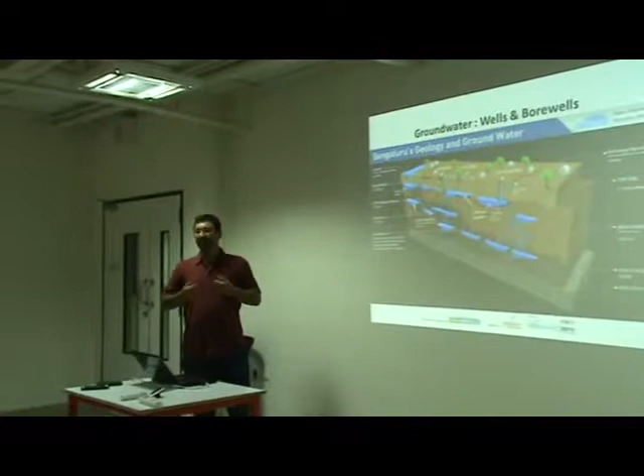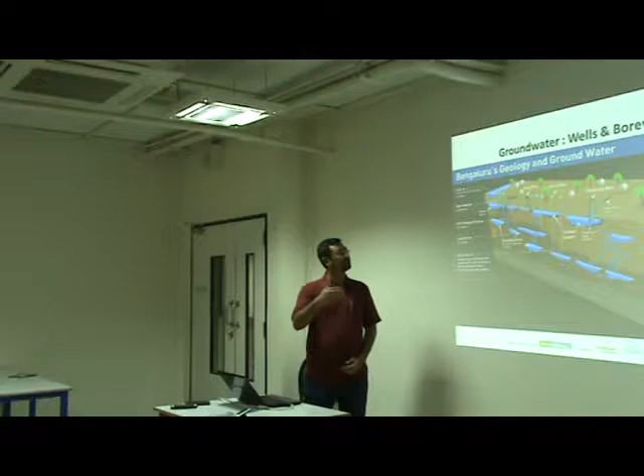What is an open well and what is a bore well? I think it's important to understand that. And if you look at the geology of Bangalore, it's broadly a 3 or 4 layer geology. The first layer is topsoil. The organic matter comes from there, the nutrients for the vegetation come from there. We are of course destroying it at very fast rates.

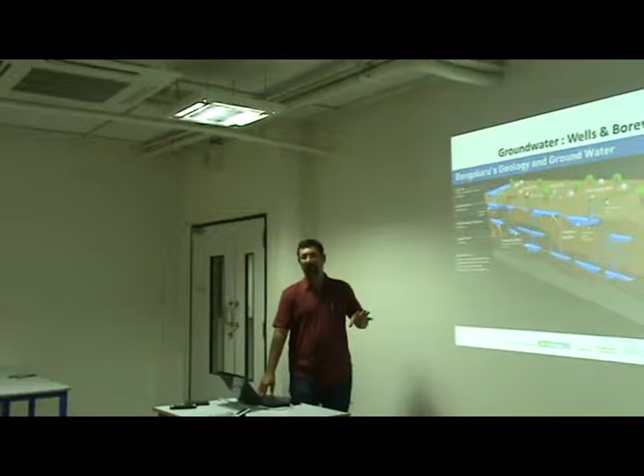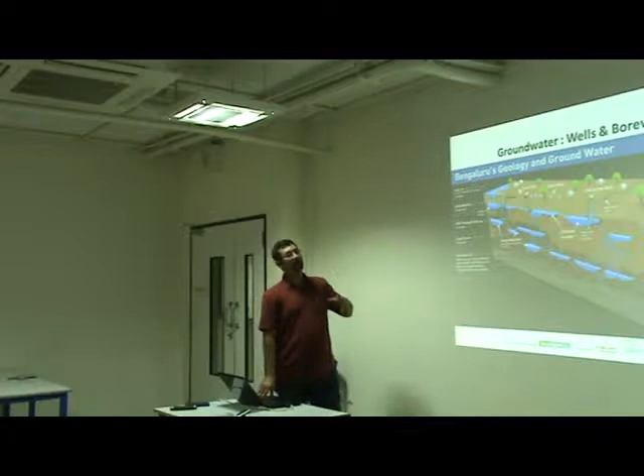But below that topsoil is something called the weathered zone. The weathered zone is essentially rock that has been powdered to what looks like soil. It has an enormous capacity to hold water between its spaces. Below this weathered zone is a zone called a fractured zone, which is rock, but it's fractured. And so it has capacity to hold water and a very high capacity to make that water move around. And below that is something called bedrock with neither the capacity to hold water nor to move water. Right? So the bedrock forms the bed above which the water table is building up.

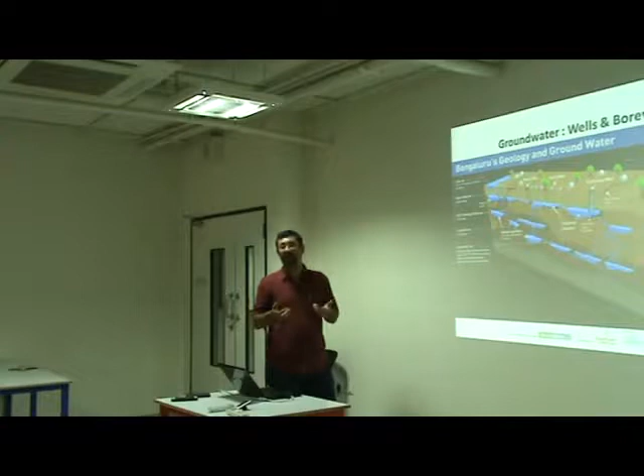Typically the weathered zone, which is what you see as soil mostly, is where most of our open wells are tapping into. So what is an open well? It's really a hole in the ground that goes down typically to the weathered zone, and it has water if that weathered zone has water. Whereas a bore well is a much narrower hole that goes way deeper. It typically goes into the fractured zone, where it's tapping into water that's coming from the cracks and the fissures of the rock. The weathered zone and the fractured zone are many times vertically connected. So the shallow aquifer many times is recharging or putting water into the deeper aquifer.

Earlier, all domestic purposes were primarily driven by open wells. The lakes recharged water. The lakes were an economic backbone in the sense that irrigation was driven by the lakes. And wells became a way in which domestic water needs were met. Then in the 80s, the borewells came and we started using borewells, and because borewells started pulling water out from the deeper zones, they started drying up the shallower aquifers slowly. So that's what an open well is and what a borewell is.

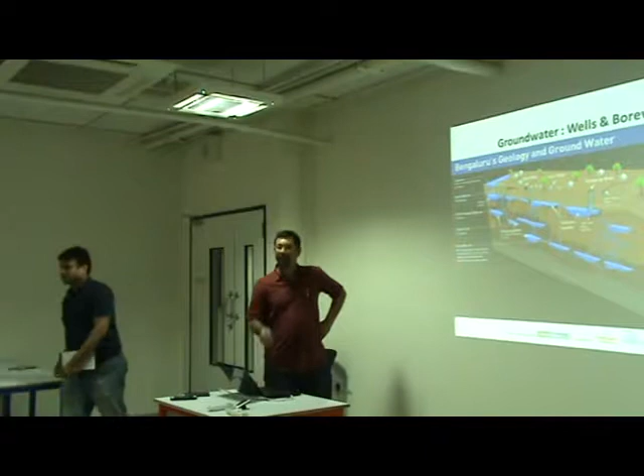Also notice that many things that we do on the surface, for example, the soak pits that are shown there, are all actually operating in the weathered zone. And if we don't treat our wastewater, if we are very careless and irresponsible with the way we deal with our wastewater, those pollutants and contaminants will eventually start finding their way to open wells and then finally to bore wells.

The advantage for bore wells is that it has a very, very large part of earth filtering it, the weathered zone filtering it, and therefore the quality of the water tends to be free from pathogens and microbes and things like that. But because it's passing through earth, it's picking up more salts, picking up more minerals, so it tends to have contaminants which are more geological.

Sometimes it's part geological, part man-made, because we are reducing our water tables and digging deeper and deeper and going to places where new kinds of salts and minerals are coming into our borewell water. So that's the geological understanding of water.

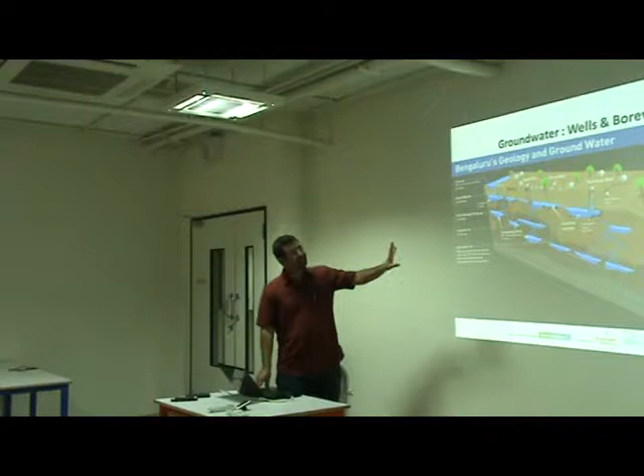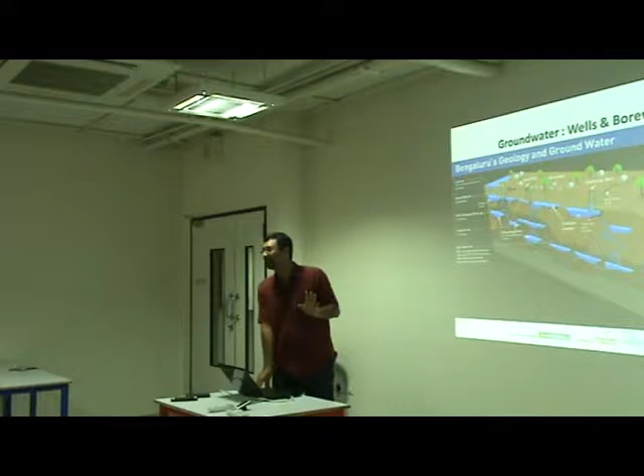Where is the water getting into all of this? The ultimate source again is the rain, through a process called recharge. There are natural processes of recharge through lakes, but increasingly there are ways we can do artificial recharge, because what we are doing is paving the surface and cutting off the source of recharge by hardening the surface. And how we can integrate artificial recharge into our management thinking around aquifers, we'll touch upon a little later.

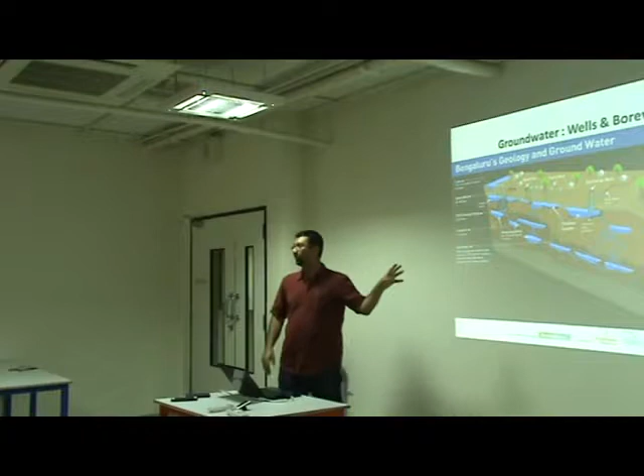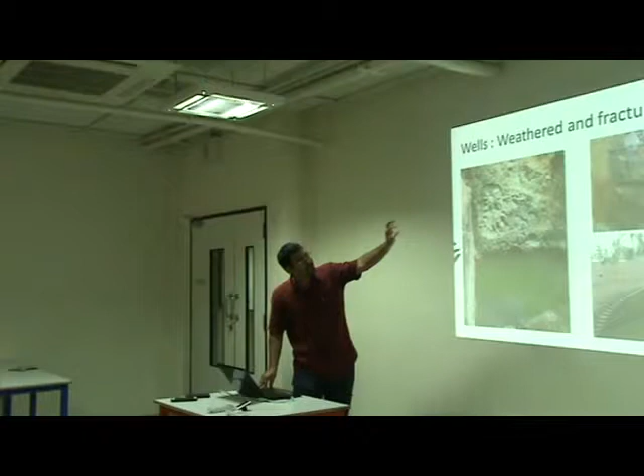If you see the one on the top right hand corner, there is a mix of weathered zone and hard rock there. So what you see as little, beautiful granite masonry work, that is where the weathered zone is. And weathered zone, because of its nature, can collapse. So you need masonry to keep it structurally integral.

So you see where there is hard rock, there is no masonry, whereas where there is a weathered zone, there is masonry. And the bottom one, near the Jakkur lake, is completely the weathered zone. So you see dry stone masonry, holding the whole well together.

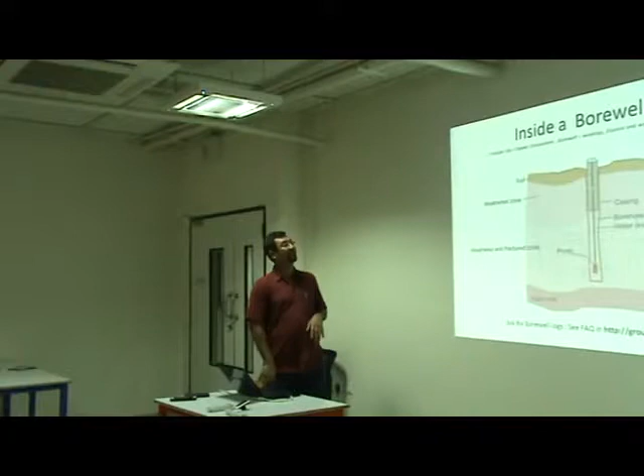These pictures are important because it will help us imagine how a borewell will look inside, and that's what I'm getting to next. So if you look at a borewell, this is a much narrower hole going right down. Here it's the same layers shown, but what the casing does is it replaces what the dry stone masonry does in the open wells.

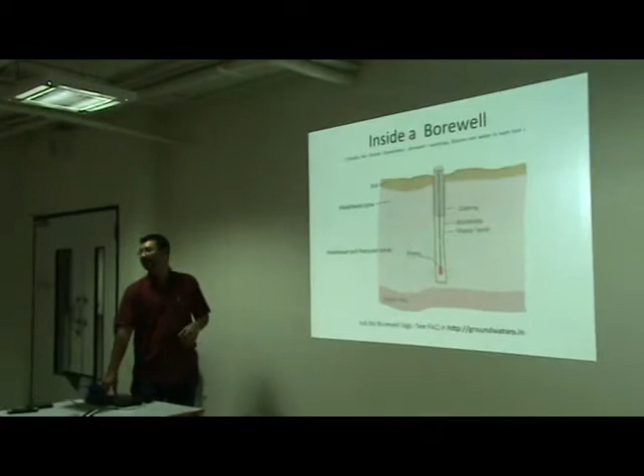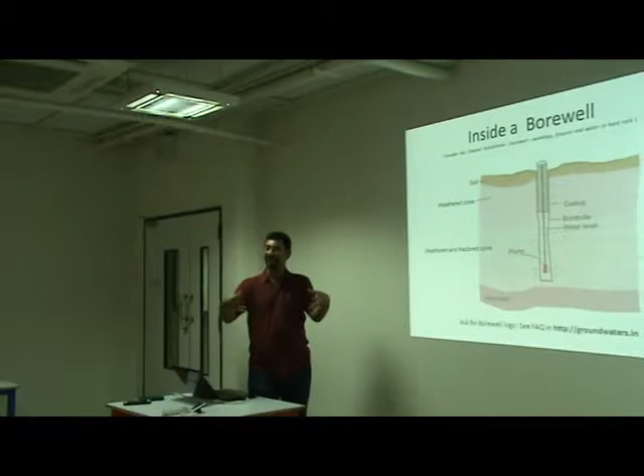You have the casing, which was earlier mild steel casing or steel casings, and now typically it's PVC casings, which holds the structural integrity of the hole where there's the weathered zone, because otherwise it's soil and it can collapse onto itself. Whereas as soon as you reach rock, because a hole in the rock doesn't collapse, you don't really need a casing there. So that's the first thing we need to understand about our borewells.

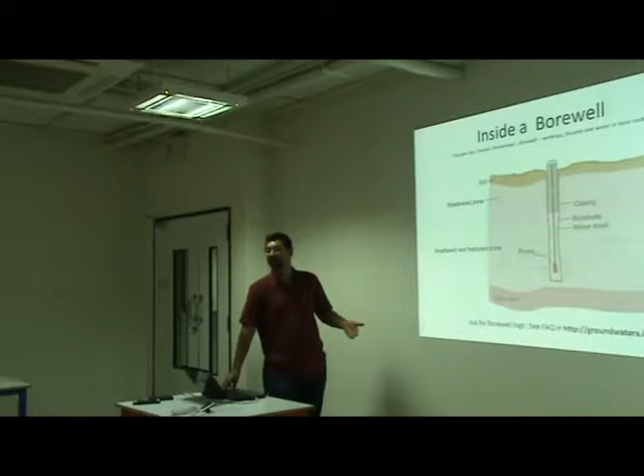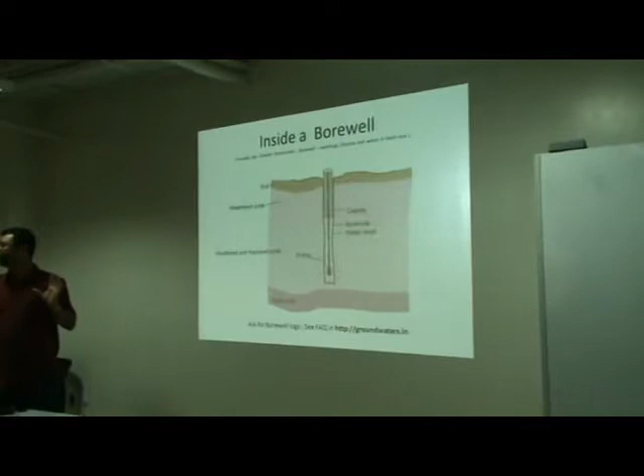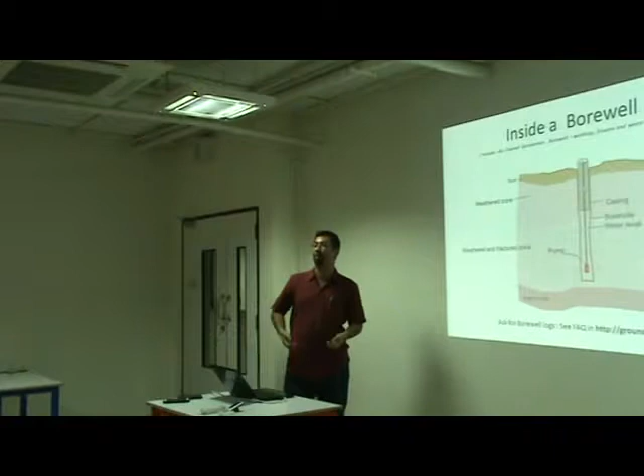It's a deep hole, so there's a total depth. There is a depth of casing, right? And the depth of casing is telling us something. It's saying that I hit rock here at a certain depth. So till the rock, it's the weathered zone, and traditionally open wells existed here. Below the casing is the rock, and that's the zone where more and more of our borewells are taking water from. Even within this fractured zone, you can have different kinds of densities of fracture as you move in depth.

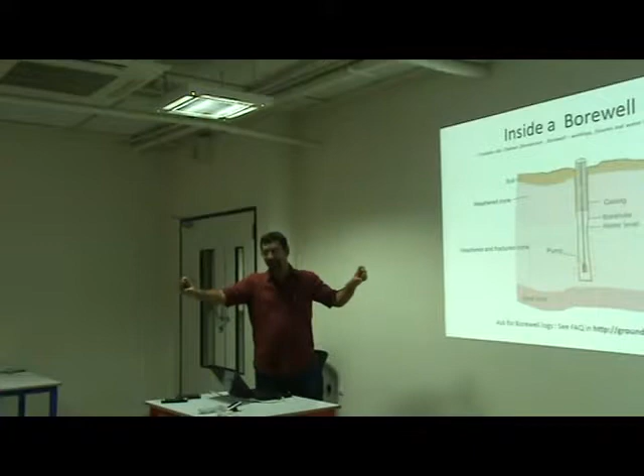And when the densities of fracture are all high and they are all interlinked, it forms what we call an aquifer. So there is one aquifer in the weathered zone, which is called the unconfined aquifer, because it's not under pressure. It behaves more or less like an open water body in terms of the pressure variations. Whereas the aquifers in the rock may be under pressure, right? And you can have different layers of aquifers even in the rock part.

So as you drill the hole, what will happen as you move through the rock is you will find cracks and fissures, and as you are drilling, you will find what you will see as little streams coming and falling into this hole that you are drilling.

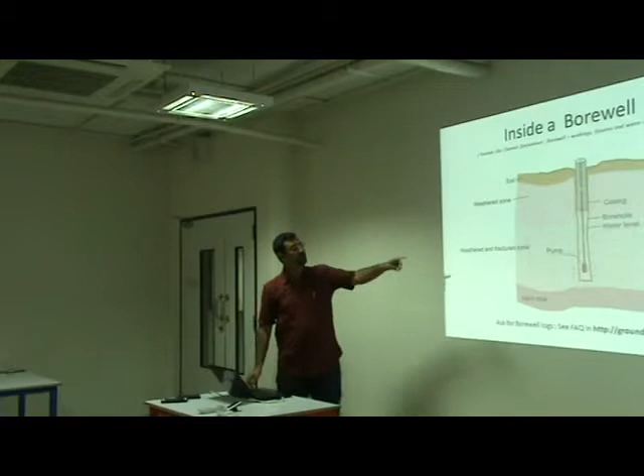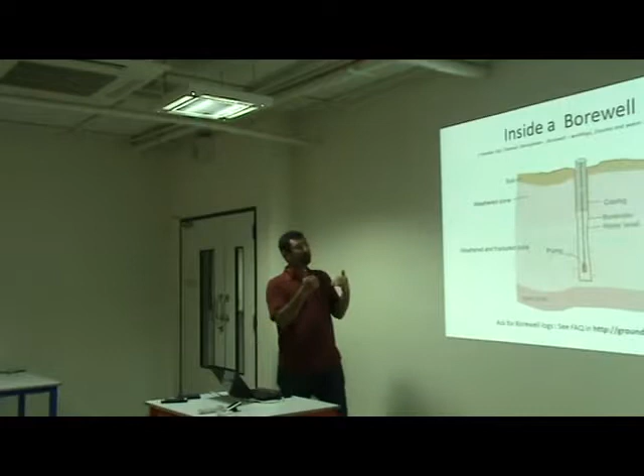And you may hit that at different points. So if you see here it shows some point here, it shows some points here, and this could be multiple points depending on the place you are in. But after you finish drilling, what will happen is all this water will come and it will stabilize at a certain level when all the pressure variations normalize. And the pressure of the water in this column will be the pressure that's holding all the water in these aquifers back as far as this borewell goes.

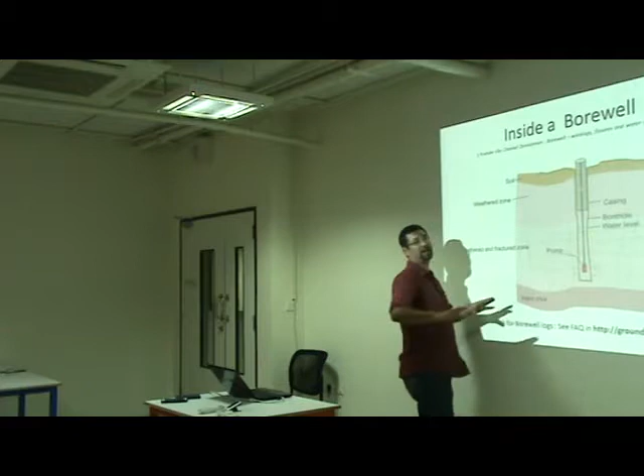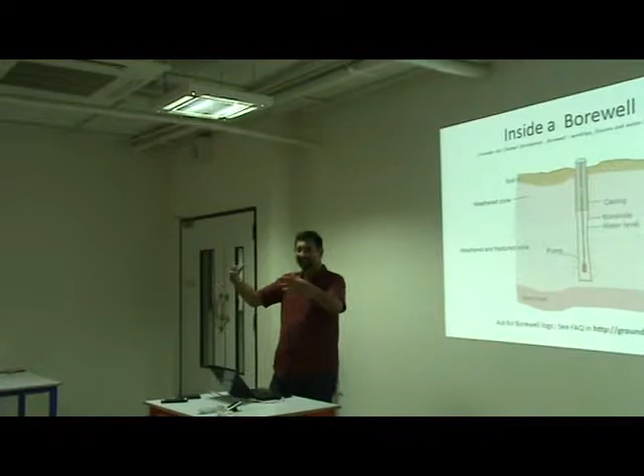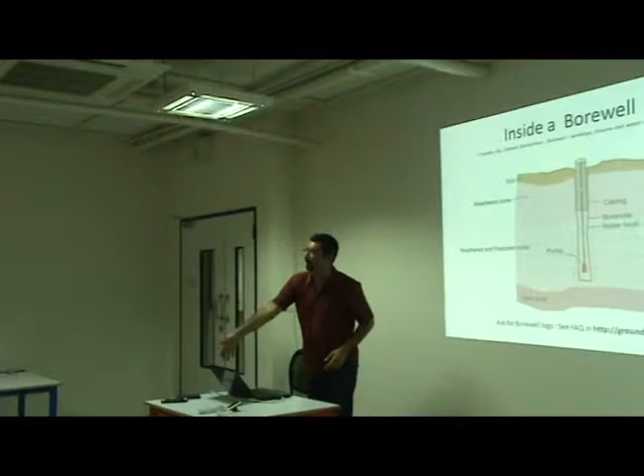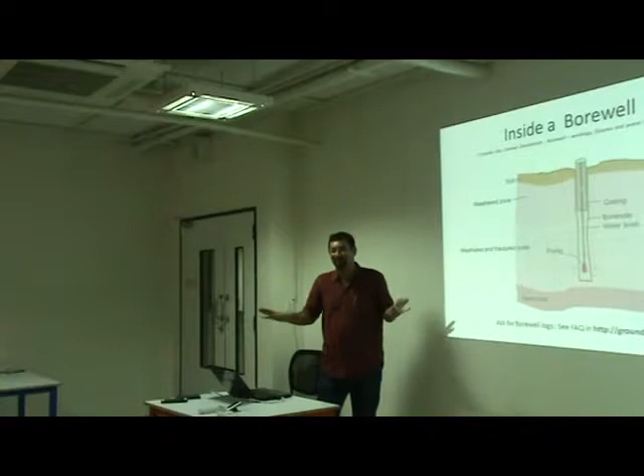When you do that, remember your energy cost of water is going up, right? And what is happening when you put in that mentality is you're already saying, I'm going to empty the aquifers, the shallower aquifers, and I want my pump to be so that I can tap into the deepest aquifer that exists. And that allows you sudden access to a lot of water. And unlike an open well, where you see the water level moving up and down, and therefore it's talking to you, a borewell is switching on and switching off. So you just switch on the thing and you just get the water out, and then one day you have to switch it off. So that's the disadvantage of the borewell.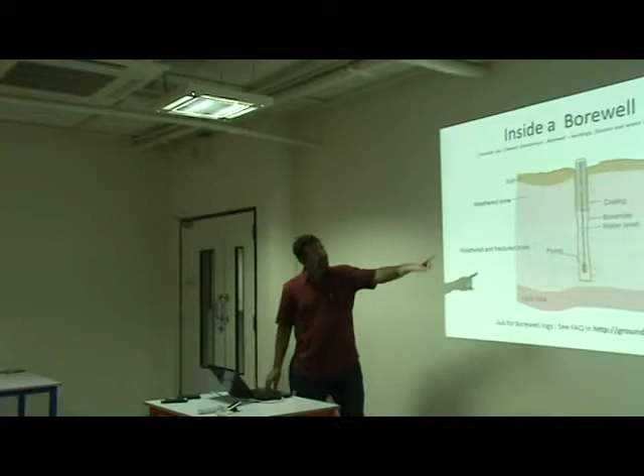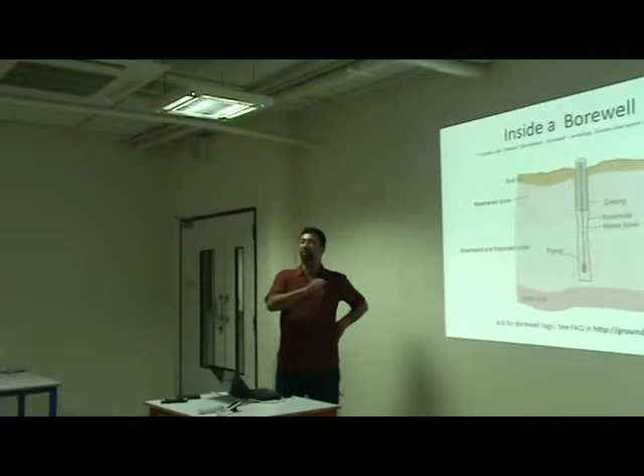But these things to understand about borewell, the total depth, the depth of the casing, the depth at which this water level stabilizes, the depth at which you put your pump, these are important things, and these form, to use more modern terminology, data points that allow us to begin to understand our wells and our aquifers. And often we forget to look at this data. When you dig a borewell, you're supposed to get a borewell log from a borewell driller. And it's important to ask for it. And he's supposed to document all this that I've just said as a part of that borewell log.

And if you were to take all the borewell logs in the city and put it together, you can actually come up with an aquifer map of the city, but we are not doing it, right? And we could be understanding aquifers at sub-aquifer level, at very local levels, and evolving management responses based on this understanding, but unfortunately that's not happening.

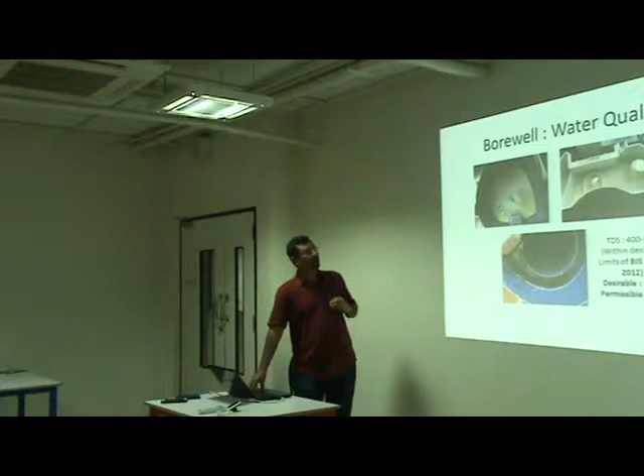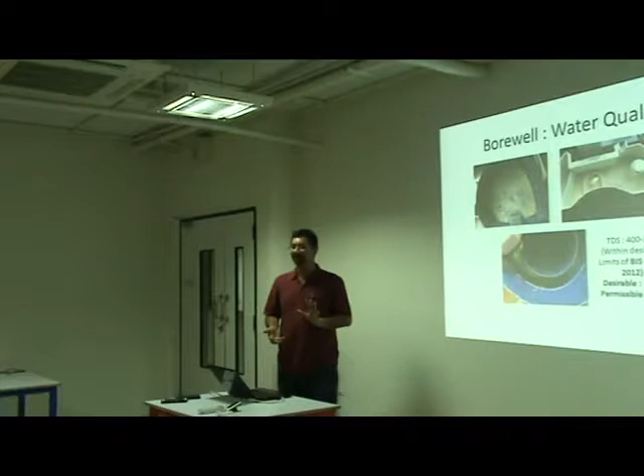So what about borewell water quality? I just touched upon that briefly in the beginning. Most borewells, especially as you go deeper, tend not to have too many problems as far as microbial contamination goes. But the water quality problems tend to revolve around what is in aggregate called TDS. Essentially, it's some or the other form of salt dissolved. Solving the water quality problem will then mean investment. So the entire industry of softeners, of ROs, etc. is really built around a shift from surface waters to groundwaters, especially deeper groundwaters. In fact, some of the lake problems of foaming are happening because increasing groundwater use means that the detergent industry responds with more foaming agents.

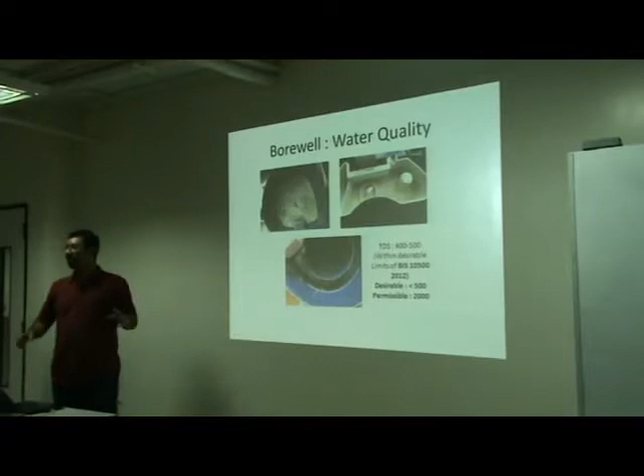Because as TDS goes higher, the water is not responding to the soap. So it's a kind of a vicious cycle that we are building for ourselves.

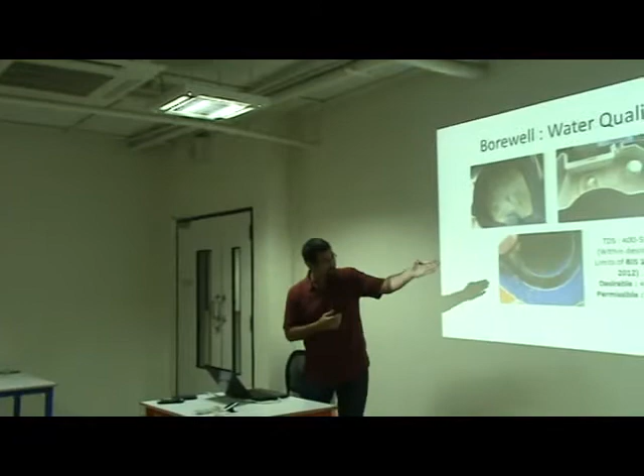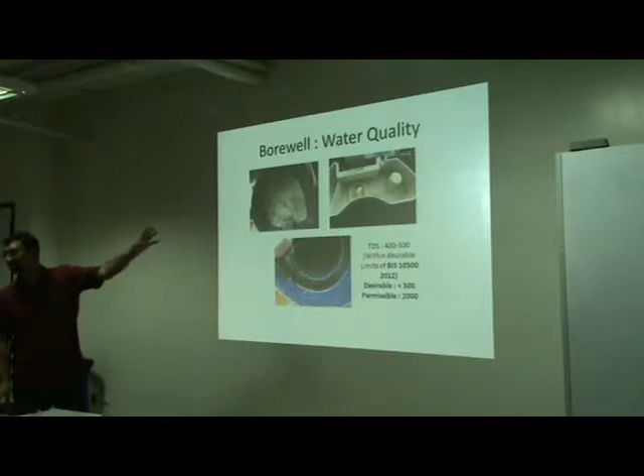Here are some pictures of my own filter, with TDS from borewell water around 400 or 500. Just because this water has some residence time in the filter, you can see the kind of salt deposit in the filter. If you look at the desirable limits, BIS standards 10500 2012 is the quality standard for India for water. You can Google it and get all the parameters.

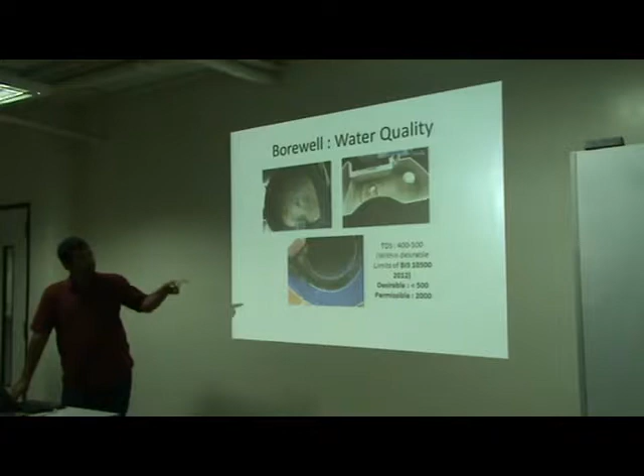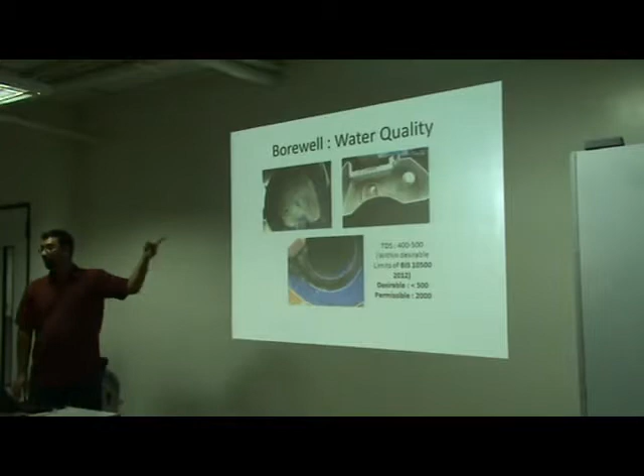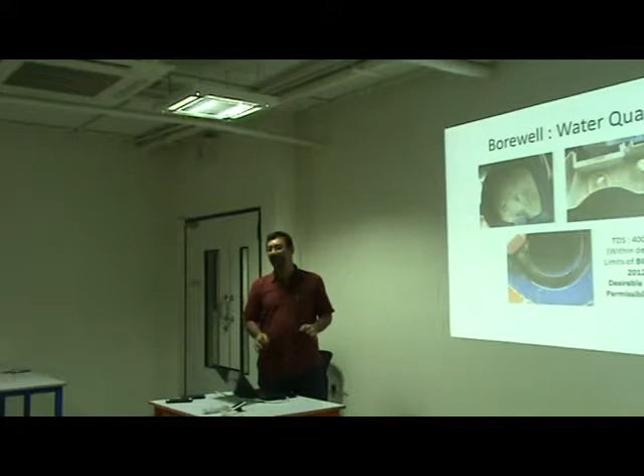The parameter TDS, the desirable limit is 500 and the permissible limit is 2000. Even when it's less than the desirable limit, the TDS levels create this kind of maintenance problems. This also means stains on tiles, stains on patre and vessels, problems of hairfall, and a lot of scaling problems with solar water heaters and other things.

So the cost of borewell water in economic terms from a quality perspective, I don't know if there's anybody who's actually assessing and measuring that.

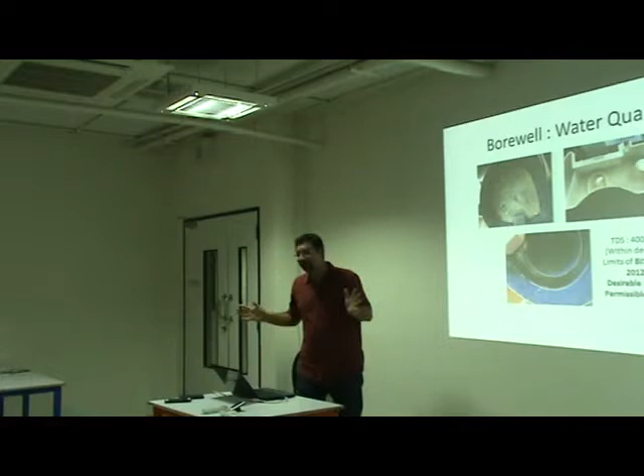In terms of regulations, there's the Karnataka Groundwater Act 2011, that's in effect right now. In my understanding, the center has post this created a model Groundwater Act which changes the principles and philosophy behind it, but that's still work in progress. It's yet to be adopted by the states.

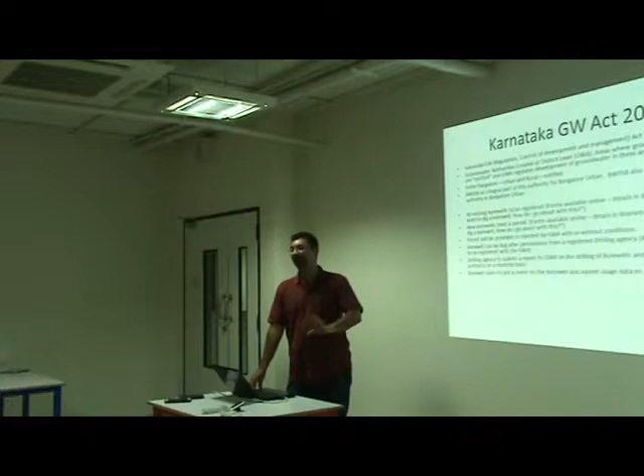But as of now, essentially what has been done is based on CGWB's studies, different areas of Karnataka have been declared as notified or non-notified. Notified means groundwater exploitation has happened there. And for all those areas, there is something called a groundwater authority at the district level. The groundwater authority is now supposed to control the development and extraction of groundwater, and regulate it.

So what it means is, in Bangalore, the entirety of Bangalore is a notified area, both urban and rural. And for urban Bangalore, BWSSB is the point person for the groundwater, as the groundwater authority. What are you supposed to do?

If you have an existing borewell, or if you're going to dig a new borewell, you have to fill out a whole bunch of forms. Those forms are available. Again, you can go to biometrust.blogspot.in. There is a detailed thing about which form you have to download from where, etc.

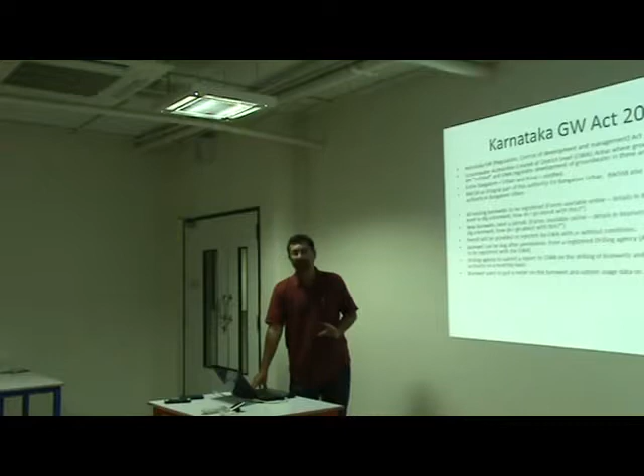You have to fill in this form, and by the time you fill in the data in the form, you're going to go nuts. But then that's the way it is. You have to fill in this form and give it to the groundwater authority. They will either give you permission or not, and they will give you permission with a certain set of conditionalities.

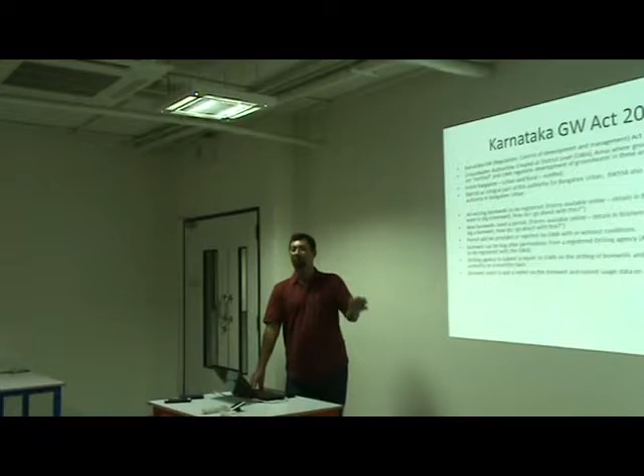Even after you get permission, you're supposed to give data about how much groundwater you're using from the borewell. And you're supposed to use only those drillers who are registered and authorized by the groundwater authority. The driller is supposed to drill only when you have a permit from the authority. So that's the regulatory mechanism.

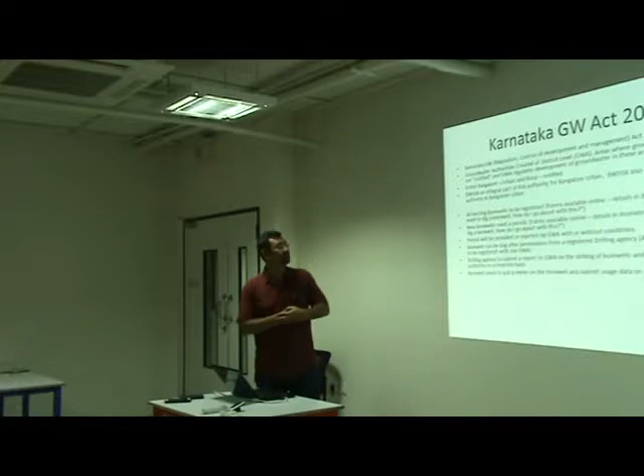Enforcement, as we know, is difficult. Not only weak, it's very, very difficult. How do you do it? Everybody can be drilling holes in the ground. But that's the regulatory environment as of today.

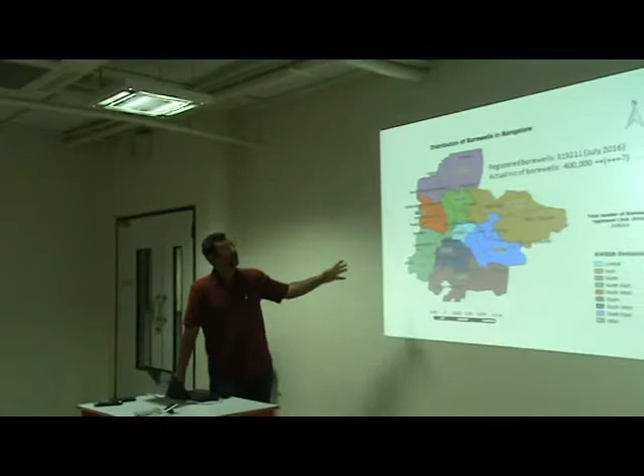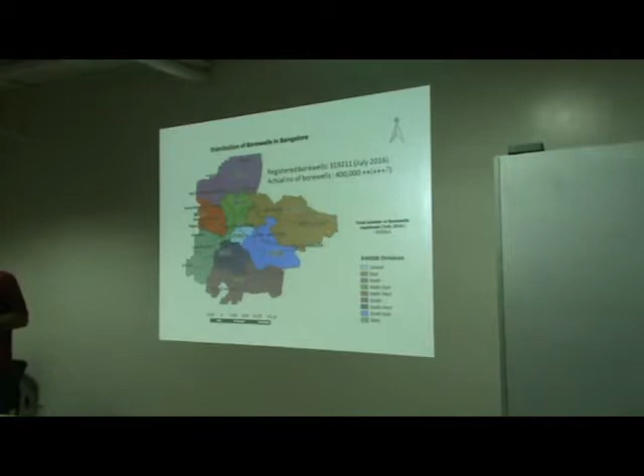With the help of BWSSB, because BWSSB is now registering the borewells, this is the officially registered number of borewells in Bangalore, around 319,211. Most significant of them come from the area which has Kaveri water supply, because BWSSB registers borewells whenever it gets connections. Post this act, post 2012, the registrations of borewells that have happened are not a proactive registration that BWSSB has done, but those law-abiding citizens who decided to register their borewell have been added to this list. This is the BWSSB division map, not the ward map of Bangalore.

If you were to overlay the ward map of Bangalore onto this, you will find many areas outside this. And therefore the real number of borewells—there have been academic studies to show it's more than 400,000. How much more we still don't know. So that's a lot of unregistered borewells. I don't know how many pluses to put there.

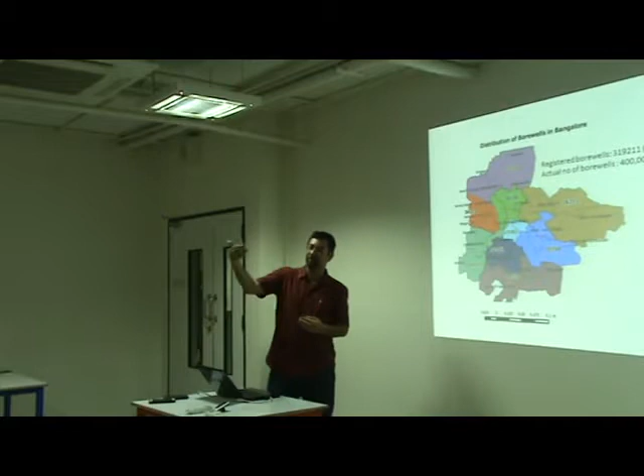That's why I left it as a question mark, but this is indicative of the rate at which we are drilling borewells. From my personal experience, going to communities multiple times after many years, one pattern I see is that when I work with a community, their borewell depths are something. I go back three years later, and some of those borewells have dried up, and they have to drill deeper to actually get water.

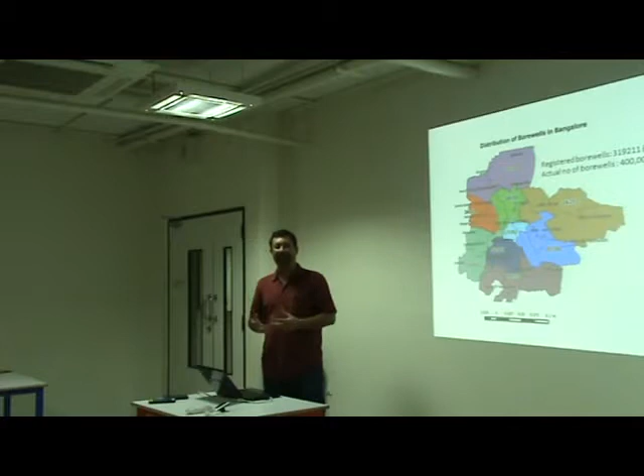The second pattern I've observed over the last 1.5 decades of work is that even to get the first successful borewell, communities have to drill far more boreholes that don't yield before hitting that first one that works. So we need to really think about the trade-offs between putting money into drilling borewells that don't work and investing money in some new ideas, which I'll come to.

And groundwater does not feature in our resource planning for water, right? So one of the first responses, and one of the first investments you can make, other than drilling borewells and buying tanker water, is to look at something called recharge.

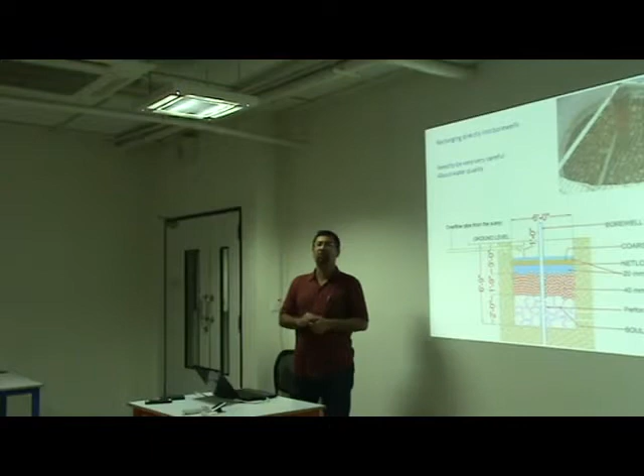Because we're talking about borewells, I first introduced the idea of direct borewell recharge, where if you have a borewell which was once yielding but is now not yielding, you can take clean water and put it back into the borewell. I won't get into the engineering details, but essentially you're taking clean water and putting it back into the aquifers in the rock zone using this method.

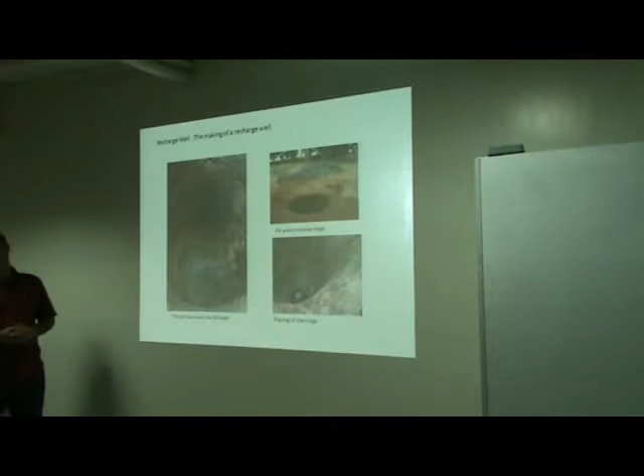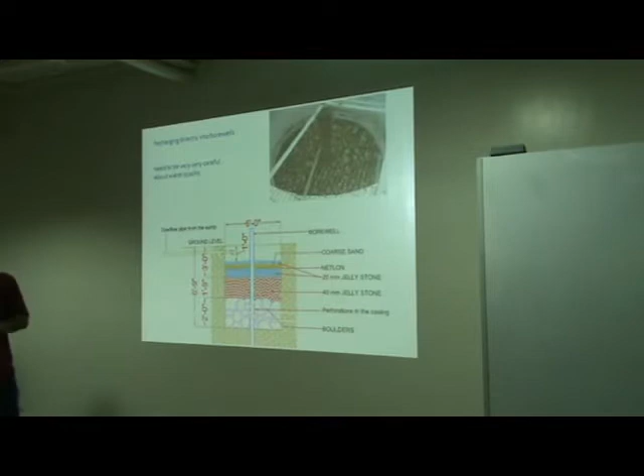But there is a simpler, cheaper way to do it, and that is to dig open wells where you can, even if dry, and try to put good water into the open well. The difference is: in this way, you're putting water into the deeper aquifers; here, you're putting water back into the shallower aquifers.

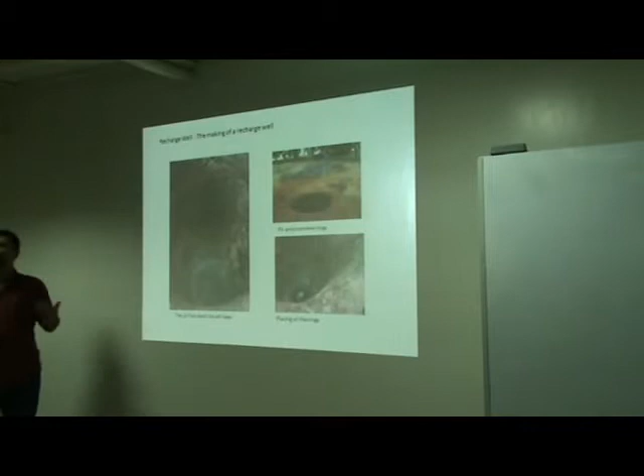Here, therefore, if there are small contaminations in the water, there is a lot of earth to actually filter those contaminations out. In that sense, from protecting a large pool from contamination, this is much safer.

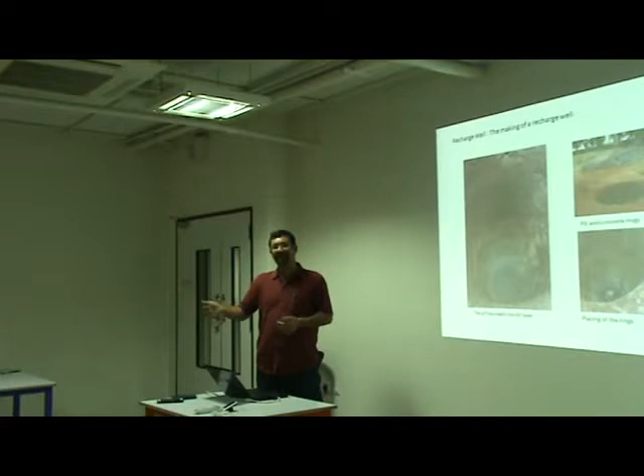Second, shallow aquifers can respond more quickly than deeper aquifers, simply because it takes much longer to go down deeper. Local shallow aquifers can come up if we use this method of recharge, which means you could be developing a local shallow aquifer which you begin to use for your water, which is cheaper, less energy intensive, with other advantages as well.

You can integrate these recharge wells into your master plan, or retrofit it so that it lends itself. It needs very little real estate. What it really needs is a bit of engagement to keep looking into your open well and see what's happening there.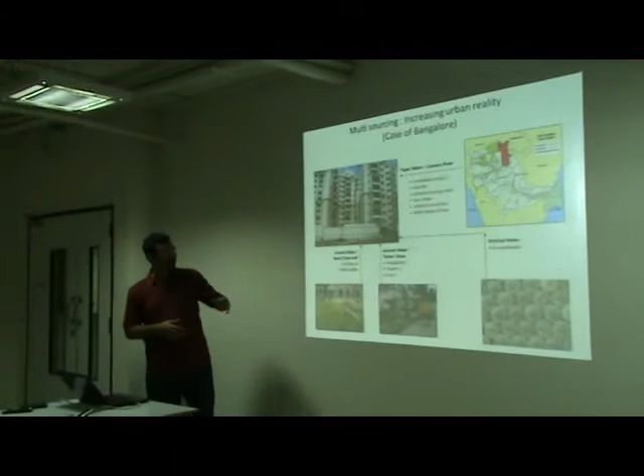So in summary, what am I saying? I'm saying that while we think about borewells and less about open wells these days, we need to think more about it—about borewells as a source of water, while we think about tankers as a source of water. In many cases I've seen people just blindly buy bottled water regularly as a source of drinking water. And for those lucky few who actually get piped water, this is how we think—we all think about supply of water.

But then, if we talk about borewells, if we talk about groundwater management, and if we talk about the challenges of the city and how we need to respond to it, we need to think about two or three completely new ways of looking at this.

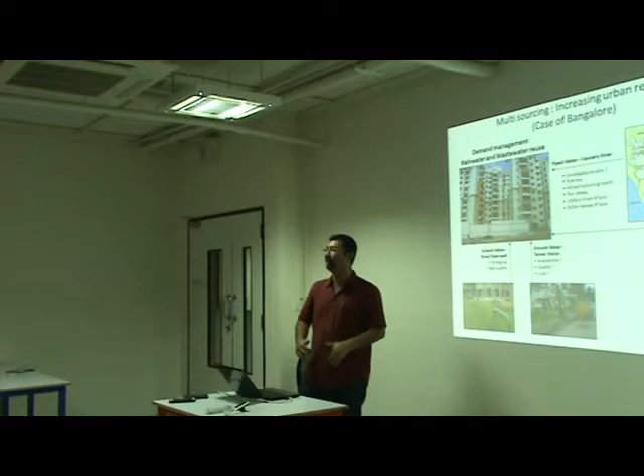First is demand management. Are we using water responsibly? Do we really need to use as much water as this? I think that should be the starting point of our response to questions like, should I get a borewell, should I go to tankers, what should I do for my supply of water. First, look at the demand side of water and ask, am I using just the water I need, or am I using it excessively?

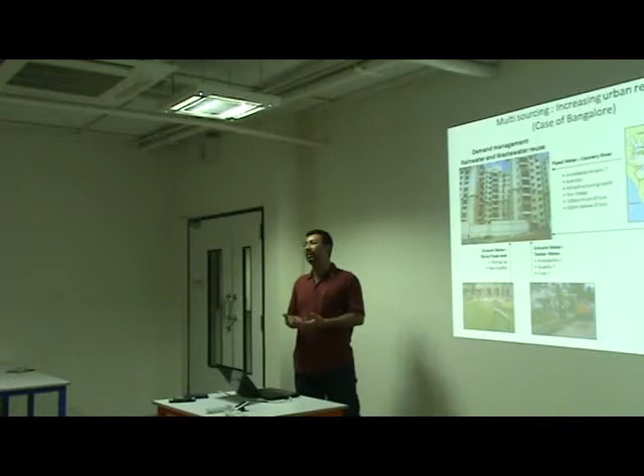Second, how do I integrate rainwater and wastewater management? Rainwater is the rain falling on your head, which you can store and directly use, or recharge in the ways I just spoke about. Then, how much of my wastewater am I really reusing? If you bring those three things into the picture, and there are many ways of doing that, then you are beginning to talk about the response, at both the individual level and the city level, to the water problem. That's really going to be the response to deepening borewells and rising tanker water prices.

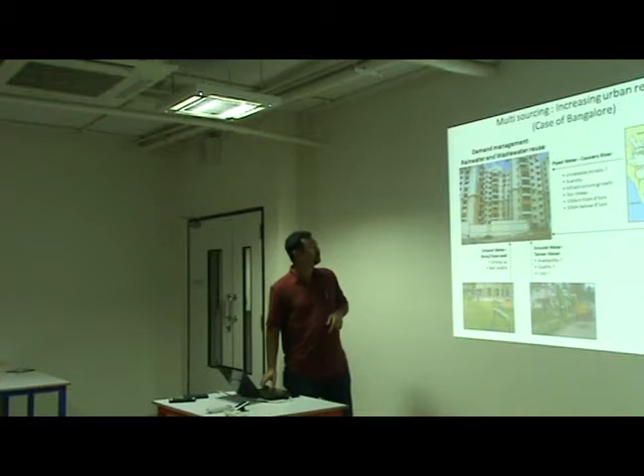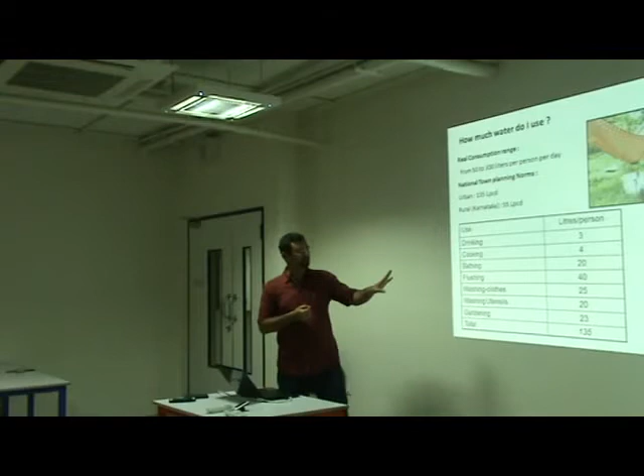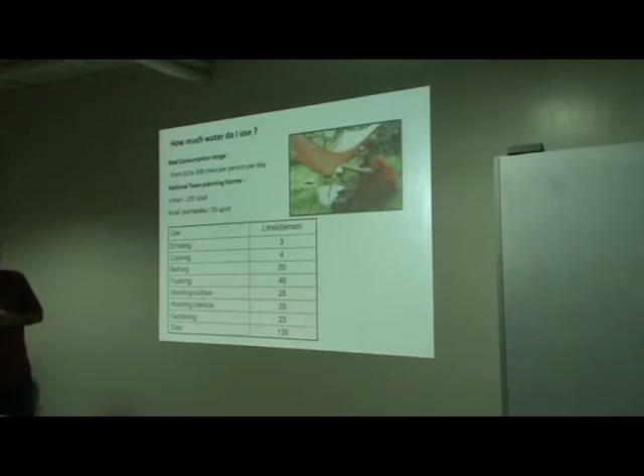Because I spoke about demand, the town actually plans its water supply based on these numbers. These are slightly outdated in terms of how it actually happens on the ground, but the important thing is 135 liters per capita per day. What we found normally is upwardly mobile communities are using 250 to 300 liters per capita per day. So the demand management angle is extremely, extremely critical.

And remember that in responding to and integrating these ideas, we bring a whole new set of people as part of the solution, and we should redefine our engagement with them - the well diggers, the plumbers. What I find time and again is our relationship with them is as though they are labor, whereas they also bring a certain knowledge. We need to accord them dignity and be fair about the wages, not haggle over pricing - I think even that's a problem, because it becomes a hurdle for the city to move forward.

Can we create livelihoods? Green jobs is the thing of the hour - these are green jobs, right? But for these green jobs to be economically viable, it also has to change the relationship between these kinds of service providers and many of us who avail their services.

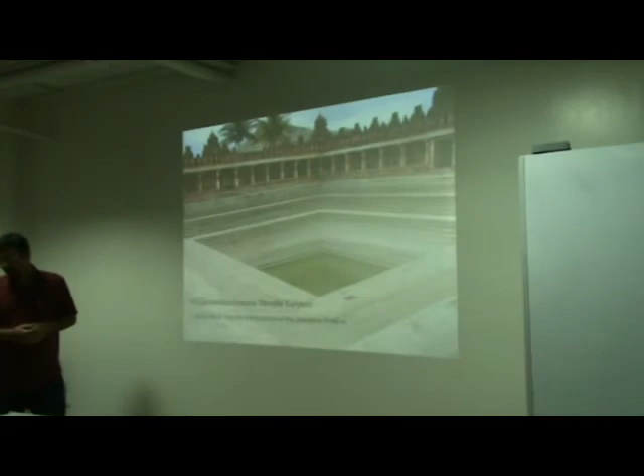I just wanted to end with this. This is the Bhoga Nandeeshwara temple, not far from here, near the Nandi Hills. This is from the Vijayanagar kingdom, this Kalyani. This is said to be the source of a river, the primary river of Bangalore - not Kaveri, not Arkavathi or Vrishabhavathi, it's the Dakshina Pinakini. Two-thirds of Bangalore is in this river basin - we don't have that in our mind.

The unfortunate thing is that we are now digging borewells to fill water in this Kalyani, which was once a source of water. So I want to bring that metaphor in, and also bring one more idea to realize - that rivers get their water from something called base flows. Why are rivers perennial? During the monsoon, of course there's surface runoff going into the river, but when there's no rain, the river gets its water from oozing groundwater. Essentially, the aquifers are full, and where there are pressure points, that water oozes out. By pumping more and more, we are not just drying up our groundwater, we are actually drying up our rivers, and Arkavathi is testimony to that. ATREE has done formal research establishing that pumping is the biggest culprit for why Arkavathi is dried up. So I'll stop with this metaphor, and we can then talk about other questions.